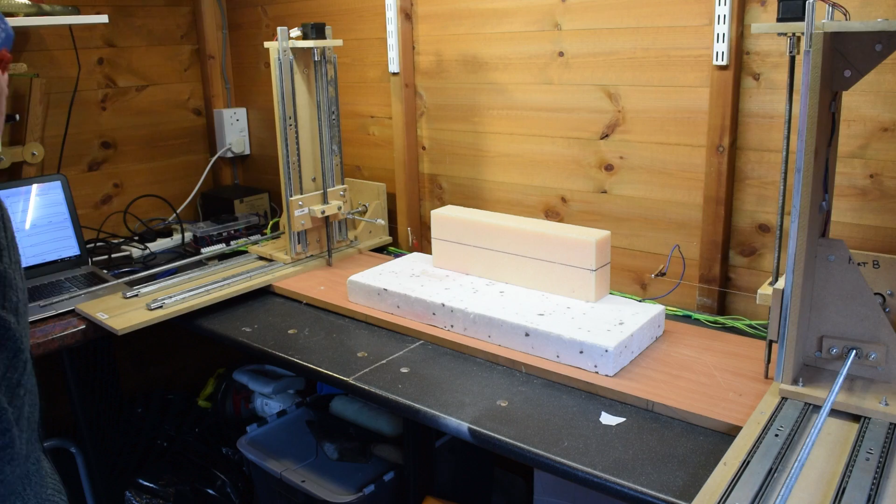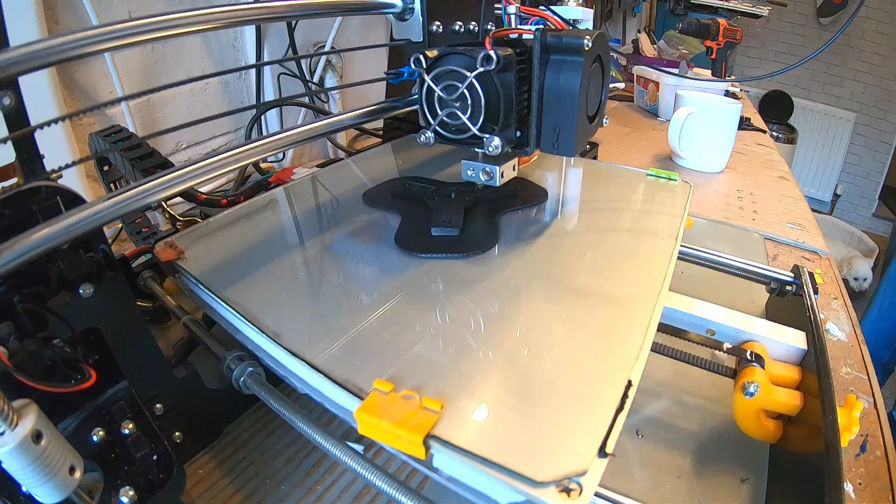This video I'm going to be using my new USB foam cutter to make some new blades for a gyrocopter, or AutoGyro as they're sometimes called. As well as making some new blades, I'm going to be making a new rotor head for it and some parts with the 3D printer in ABS. So it's going to be some foam cutting and some 3D printing. If that's interesting to you guys, then stick around and let's see how it goes.

You may ask why do you want to build some new blades? Several years ago, I bought a plan for an AutoGyro from a guy called Richard Harris. He's well known in the AutoGyro world, and he's had quite a few plans published, radio control plans. I bought one called the RPG. Sent off for the plan, it came and it was brilliant, but it looked a fair size model, and I'll put a picture up of it so you can have a look.

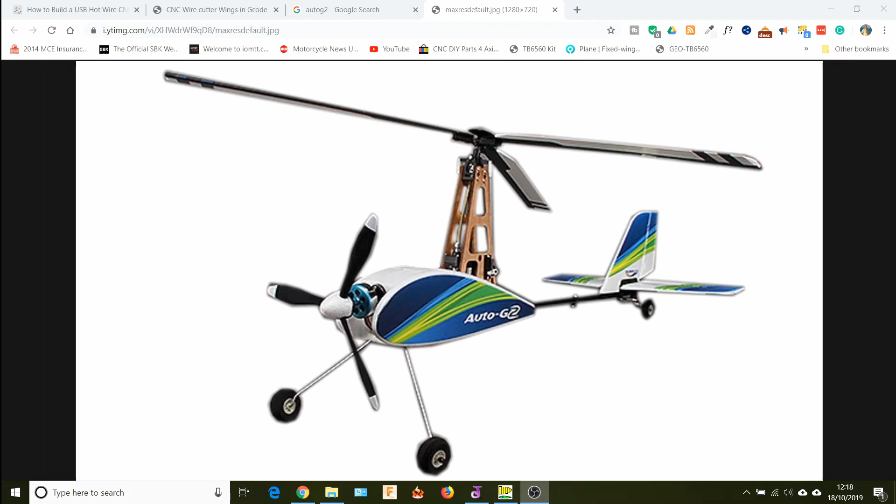When I got the plan, I thought, well, what's the chances of me building that and not crashing it first time out? So I thought I'd probably start a bit easier. At the time, Hobbyking had just brought out a new version of their AutoGyro, the G2, and that's got a pre-rotator on it.

See that little shaft going up there, that actually spins the rotor head, and it's got a separate little motor in there, and then it freewheels afterwards, and that spins it up and makes it easy to take off. I never had any problems taking it off.

It seemed to take off reasonably well, but once I got into there, I seemed to lose orientation with it, and I think basically I was trying to fly it like a fixed wing. Well, after 3 sets of blades, 2 props and various other parts for it, I gave up with it. I'd spent more on the spares than the actual model itself.

So I'd even decided to convert it to a fixed wing, and I made a foam wing for it, and I've still got the wing. I haven't progressed with it any further. This has been sat on the shelf for about a couple of years now.

So a little while ago I got the bug again for AutoGyros, and after watching some videos on YouTube, as you do, you watch something and think, well, I wonder if I can do that. Probably my failing, that is. See things that I think I can do. But I thought I'm not going to be spending out on all these blades again.

So I wondered if I could make one with the USB foam cutter that I've got on the website. This is the new USB foam cutter, and I've got a full video tutorial series, and there's a free ebook that goes along with it.

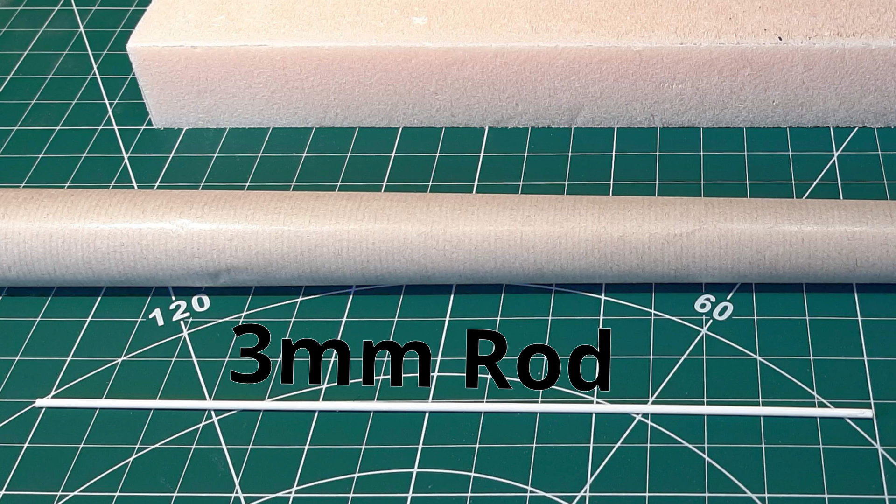We're going to be cutting a slot in here to put a strengthening spar in. And I've used some 3mm fiberglass rod that I've had kicking around, but 3mm carbon spar would be fine as well.

Then to give the wings some strength, what we're going to do afterwards is cover them in brown paper and PVA or white glue, sometimes called Elmer's in the US. I've covered lots of wings with this, and it makes an amazingly strong wing.

So from a sample blade I made, I put a carbon spar in there, then covered it in brown paper and PVA, and gave it a coat of sanding sealer. The blade's incredibly strong. I almost bent it double, and it hasn't broken.

So I think they're certainly going to be strong enough for this, and I think they're actually a little bit lighter than the Hobbyking blades as well.

So the other thing we're going to need is a way to cut the blade, and as I said earlier in the video, I'm going to be using my new USB foam cutter. So this is what I'm going to be using. That's my old design underneath, which is similar but uses older technology. I'm going to be using this here to cut the profiles in the foam.

But to do that, we need some software, and there's a few different pieces of software we can use. The one that I've used mostly in the past is one called Profili, but that's no longer available. It was paid software, but it's been superseded now by DevWing Foam, and I've upgraded that. But we have got some free options as well.

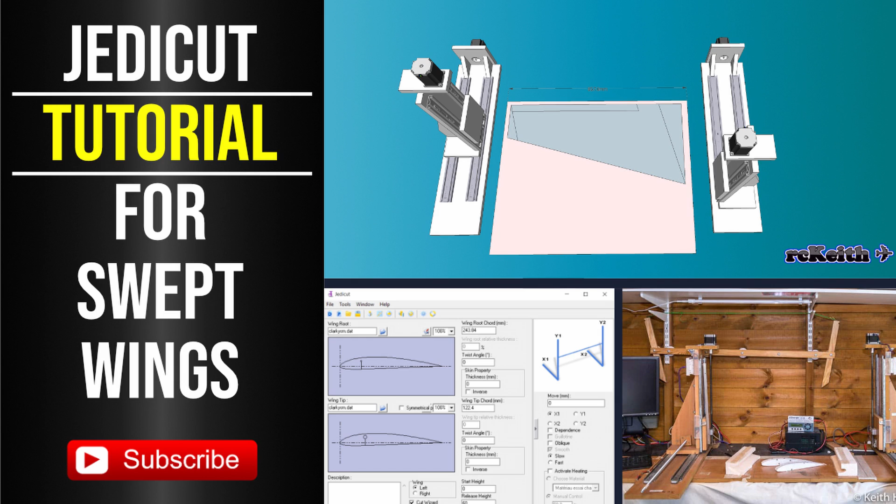Another option is one called Jedicut. It's another free version, and I've got videos on using both of these, so I'll link you to a video. The first half is about cutting a swept-back wing, and then the second half goes into Jedicut as well. So I'll put links up to them videos as well, if you want to use that instead.

But what I'm going to be using is DevWing Foam. So if we just bring DevWing Foam up.

This first little splash screen takes a little while because it's checking for a license. If you haven't got a license, you can do nearly everything apart from generate a G-code. So if you want to just try this program out before you commit to buying it, you can do that. As I said, it's not a free program, but personally I think it's well worth it, because you can make loads of wings, and I've made loads with Profili, and we'll be making a load more with this one as well.

So you can see I've already done one already, but we'll do a new one. So we'll create a new project, and on DevWing Foam, any window that's got a red line on it means that it's mandatory, so we have to put some details in there.

So we'll call this AutoGyro, call this demo, and we have to put some settings in here. So half wing length, this is going to be our blade length, so the blades are actually 370mm long. With DevWing Foam, there's lots of options on here that we're not going to need. We can even just take this expert mode off as well. For doing this blade, we only need a few of these options, so you'll see a lot of it we won't be doing, but I will be doing a full tutorial on DevWing Foam in a later video, so keep an eye out for that if this interests you.

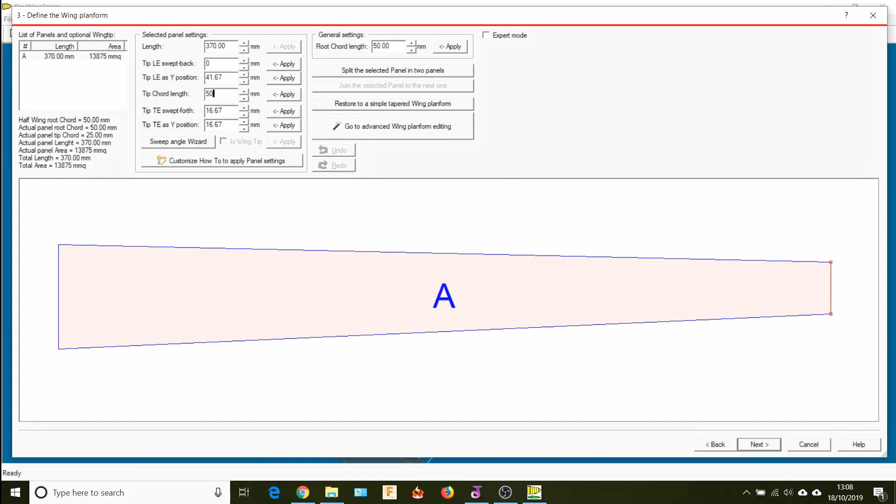So this again is a mandatory screen, and it's made a tapered wing for us, which we don't want. So we just put 0 in the sweep back, and then if we put 50 in the tip chord length, we apply that.

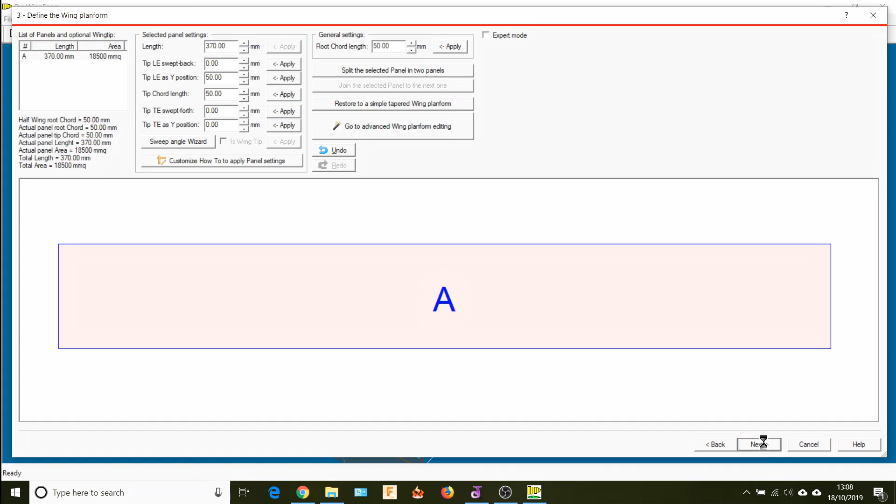Oh, it's gone back to 25 there, 50. Apply that. So now we've got our square wing, and you can see there's quite a few other options here designed for when we're using more panels, but that's all we need in this one. So it is 50, yeah. So we'll go on to next, and we can split the panels if we want, but we don't need that. You can see it's optional with it being yellow.

So this is a mandatory screen, and this is where we need to specify the airfoil we're going to use for this. Now, from my research I've been doing, it looks like a lot of gyrocopters use the Clark Y airfoil, and I found a video with a guy that actually built some blades for the AutoG2, and he used an airfoil called the Aquila, and he says it flew tons better. So I'm actually going to give that one a try.

So on DevWing Foam, what we do is we go into the root airfoil, select, and it's this one here called Aquila. I've got a filter on here, but I just take the filter off. In DevWing Foam, it's got hundreds of airfoils in here, and if it hasn't got one that you are after, you can import one, and there's quite a few places you can get airfoils from on the internet. I'll put some links in the description.

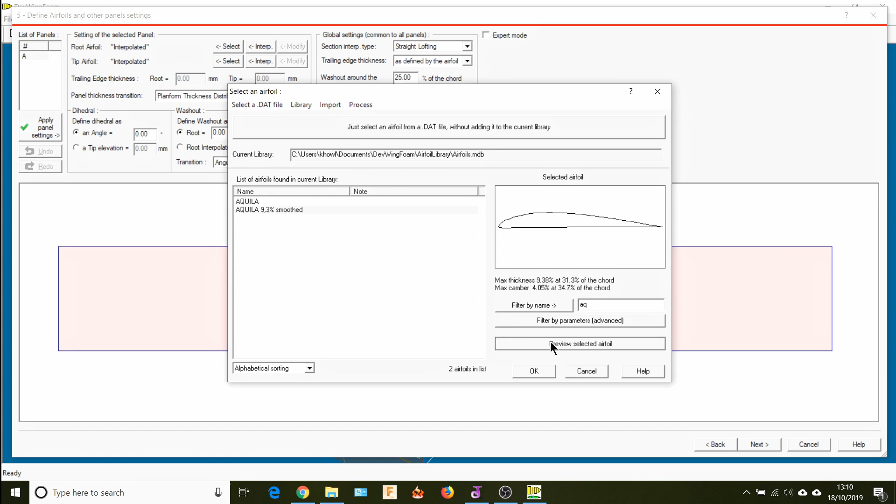So what we'll do is we'll just go for that Aquila again, and we can preview the airfoil as well. So you see it looks very much like a Clark Y, but I think it's a little bit flatter at the bottom. I think the Clark Y has got a slight camber on the bottom. So we select that one, and then we select the same for the tip.

This section here, interpolated, what that means is if we've got more than one panel in here, all we have to do is specify the root of the first panel and the tip of the last panel, and it will work out all the others. So we haven't got to go through and specify each one, but we'll cover that in a later video anyway.

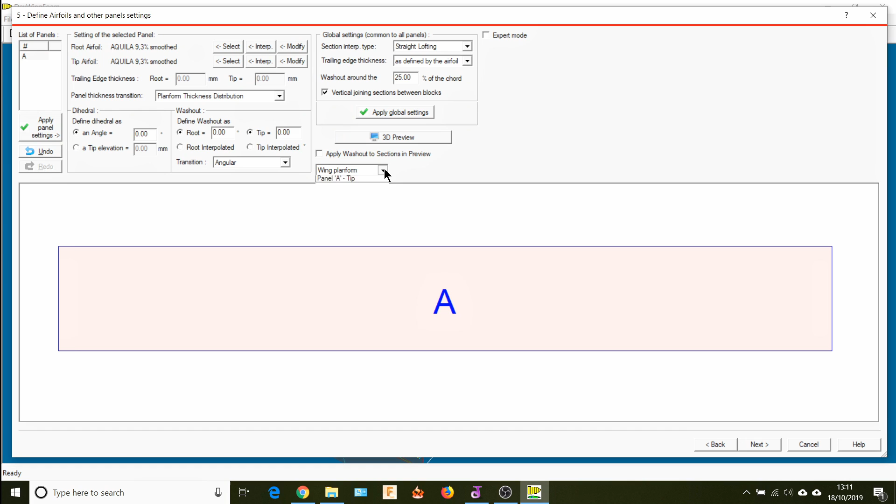So the other thing we do here, if I now apply that, and if we now look at panel A, which is the root and the tip exactly the same, there's no difference there. So what you'll notice down here is the airfoil comes to a point.

Now when we cut that in the foam cutter, what happens is this can get very thin, and it can burn away the actual foam itself. So there's a good option in DevWing Foam, and it's this one here, trailing edge thickness.

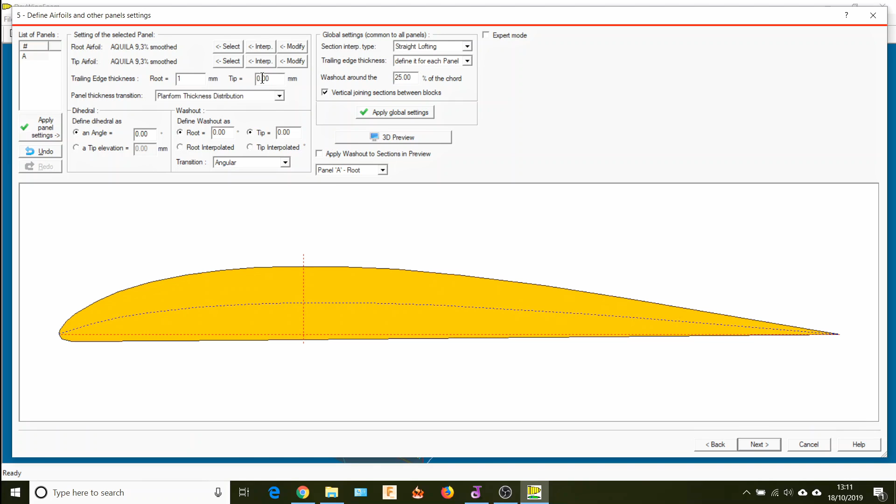So if we go into there, it says define it for each panel, but we've only got one panel. So what I found through testing is 1 millimeter there, and if I apply that, and if you watch at the tip now, you see that's expanded there. It looks a lot more than 1 millimeter because this is only a small blade, but that stops it from burning away to nothing. And through the testing I've done, that works out quite well.

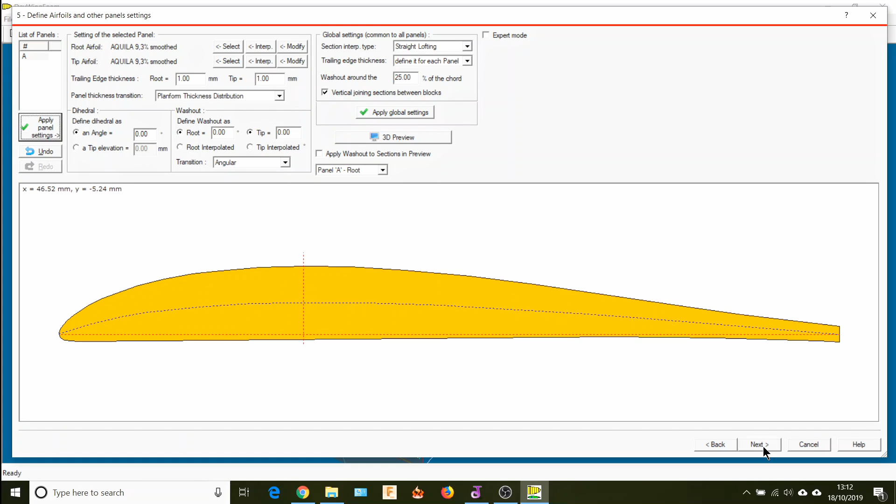Actually, we've got loads of other options in here, dihedral and washout, but we don't need them, and I'll cover them in the DevWing tutorial. So I'll go on to next. This is optional, and most of these other options we don't need now. We've done what we need, so we'll just carry on through them.

So that's saved that part of it.

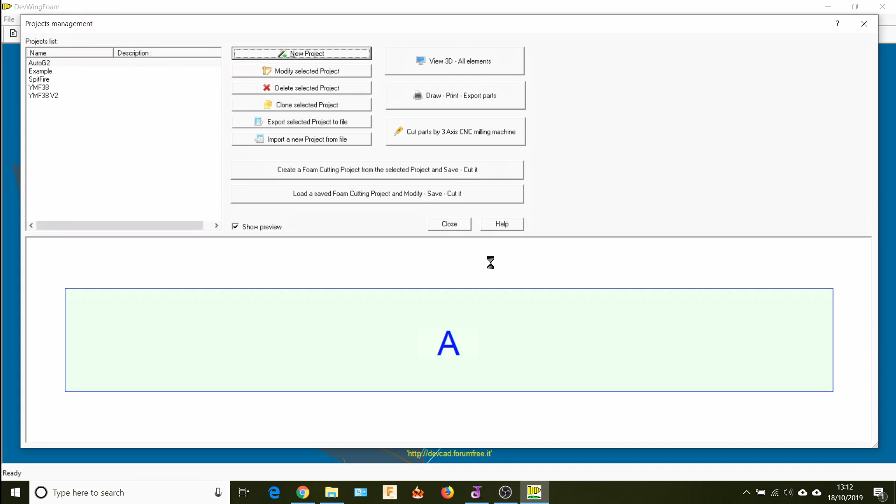So now we've done the design phase, what we need to do is actually create the cutting project. So we select our project there, and what we want is this option here, create a foam cutting project from the selected project and save it. This is what's going to actually generate the G-code, so we can cut our wing, cut our blade. Keep calling it wing. Right, so we select that.

And this is what we've done in the design part, so we've only got one panel in there. But what I like about this DevWing Foam, I can actually put 3 in there, so we can cut all 3 at the same time. Now, if you've got a swept back wing, you'll need to cut a left and a right, because if you cut 2 rights, you'll have a wing that won't look quite right.

So it doesn't matter which one of these we do, because this is just a straight wing. What I do is put it in 3 times, and that allows us to cut all the blades at the same time, rather than having to set each bit of foam up. Right, so we go on to the next.

This is where we set the speed, the kerf values, and the cutting strategy, which we don't need to mess with in this one. The speeds I found here are absolutely fine, but what I did find was the kerf value needed altering. The kerf value is the amount of foam that's going to be melted away by the cutting wire.

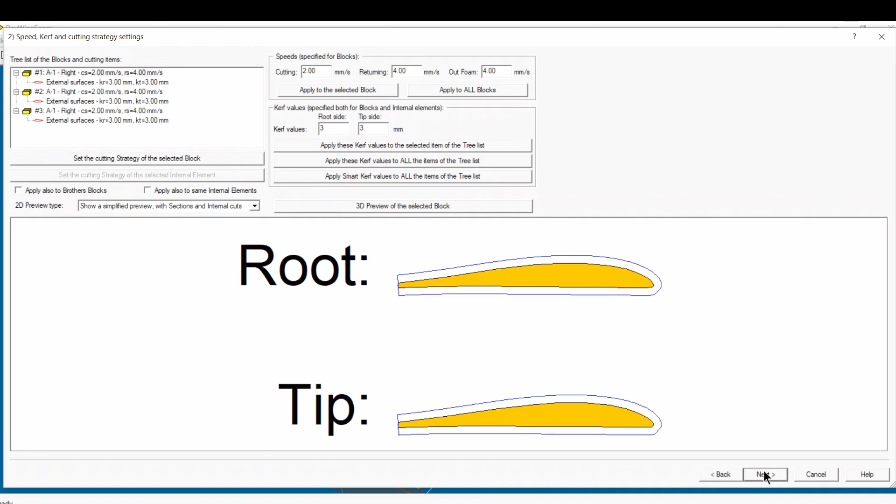Right, now this section here, setting the cutting order and foam block size, it goes in from the top anyway, so we don't need to change anything there. But what I have done is I have altered the values here to make these a bit closer, because I said earlier I'd only got 1 piece of foam left that was just big enough to do this.

So what we do is we select the bottom one and go into the top dialog there, and all we do is lower the space underneath to 5. That brings it down a bit, and we just do it for each one.

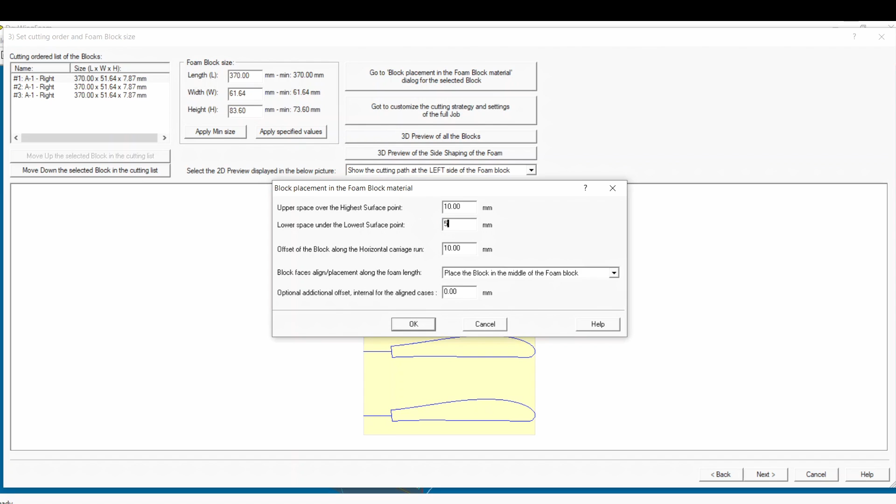You can alter the others as well if you want to get even closer, but you don't want to get too close, as they'll start running into one another. So if we apply minimum size there, that's telling us the minimum size of foam block we need. I think I used about 70 by 80 when I did the actual cutting of the foam.

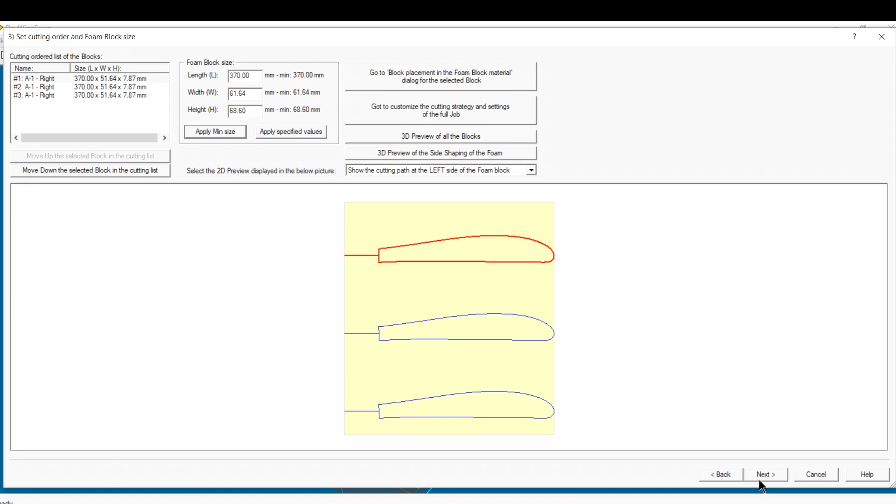Right, so that's all we need on that one. And this is the placement of the foam in the machine. Now, what you can do is you can set your machine up here.

So this gives the distances of the gantries from each other and the X and Y travel. My machine is set at 1000 millimeters or 1 meter, and then I've got 600 on the X and 400 on the Y. But if your machine is different, you can change those values there.

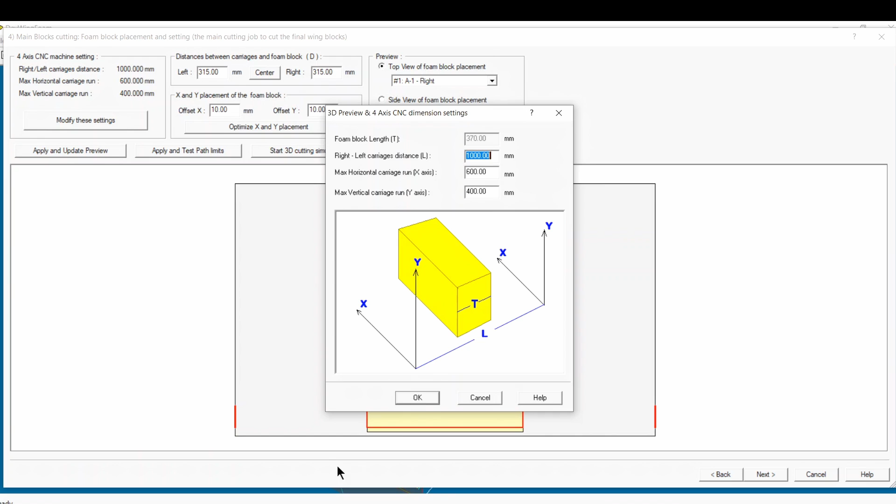So that's where it's going to place the foam block in the machine. But if you're doing a swept back wing, you need to make sure you get it in the right position. Otherwise, you can end up with a wing that's either smaller than you think or bigger than you think. But we'll cover that in a later video anyway.

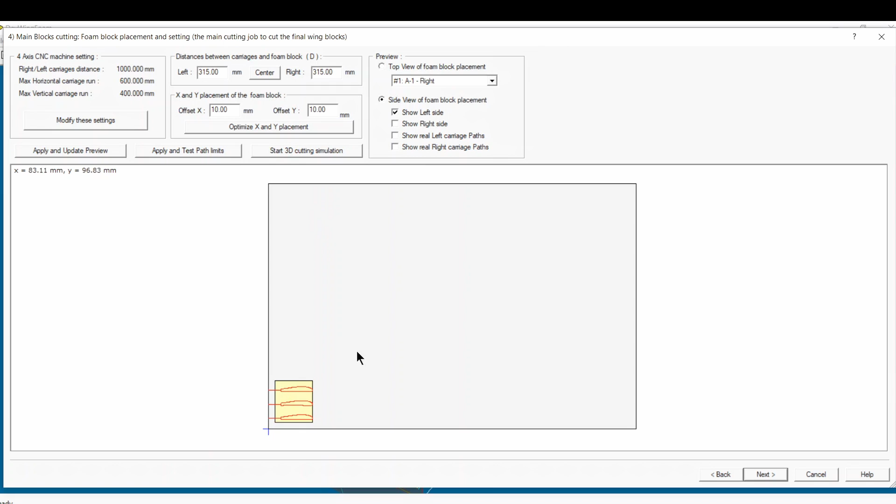So the other thing I do here as well, as you can see looking at the side view, it's actually got the foam block 10 millimeters up and 10 millimeters from. But I like to set this to 0. See, that comes down, and I get my wire as close to the block as possible. It's got a little bit of lead-in on there as well, so it'll be fine on that.

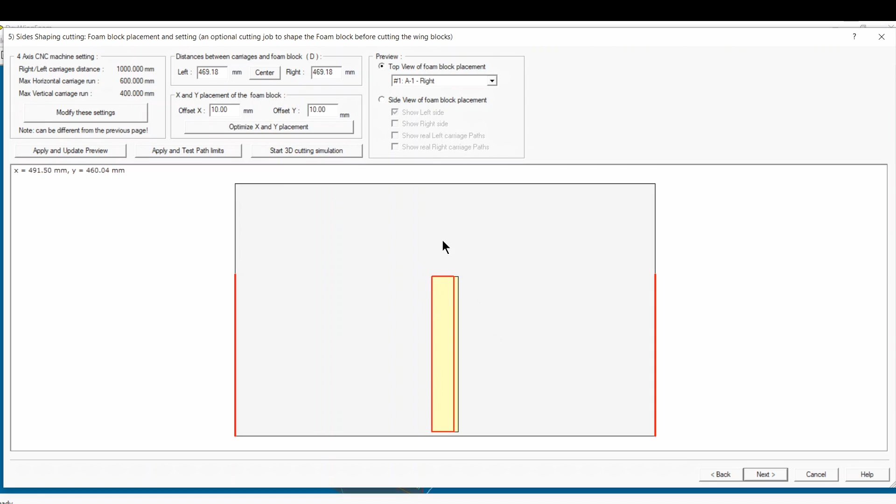So go on to the next screen. This screen here is actually pre-cutting the foam block for us to the right sizes. You can either do this manually or let the machine do it. So from the sizes that it's given us, we can cut the block to that size, or we can let the machine do it. But we don't need that in this case.

And the first thing I like to do when we get to the final page here, where we actually create the cutting file, I just like to save the cut project first. I've done this before, so I'm just going to replace that. And then what we can do is we can view them.

So that tells us the minimum size of foam that we would need for that.

If we go back, we can do a simulation. We've also got the option there, that second option at the top, where we could cut the foam block to the right size if we wanted to do that, and we would have two cut projects then.

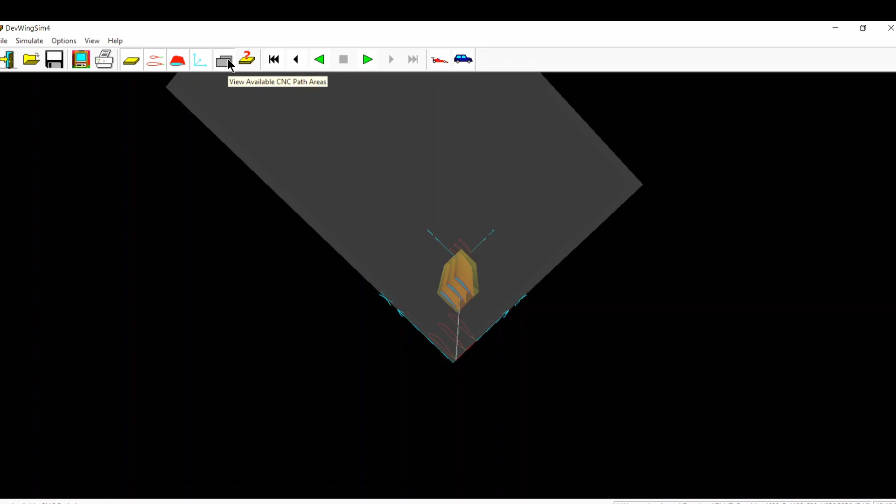So we just look at the simulation, spin it around a bit, and these grey ones here are the available paths for the axis. I'll just take them off, it's a little bit easier to see, and then we'll just zoom in a bit.

So this is the path the wire's going to take. For a straight wing, it's the same as the actual path of the aerofoil as well. But when you're doing tapered wings, this end will be bigger and that will be smaller, and vice versa when you do the other wing.

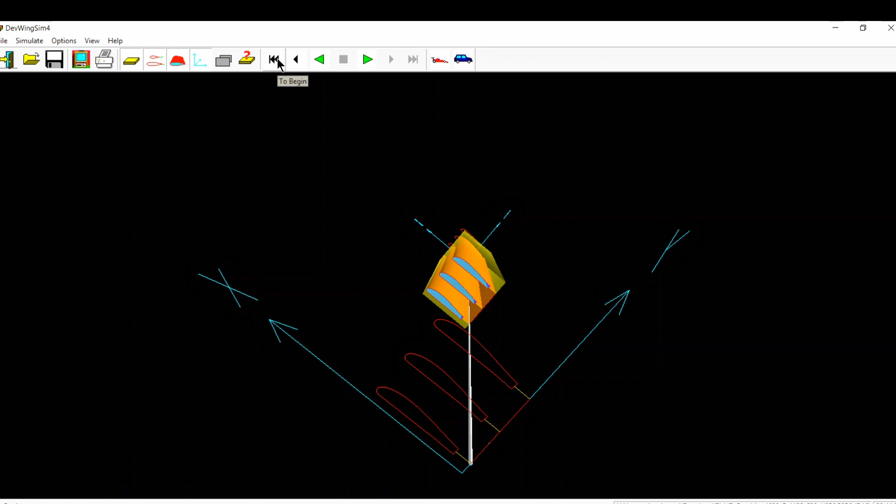So what we'll do, it always starts at the end, we'll just run it back to the beginning. It's quite good sometimes to do this simulation section so you can actually see what it's going to do, rather than get out to the machine and think, oh, I didn't expect it to do that. So we'll run the simulation and just see what it does.

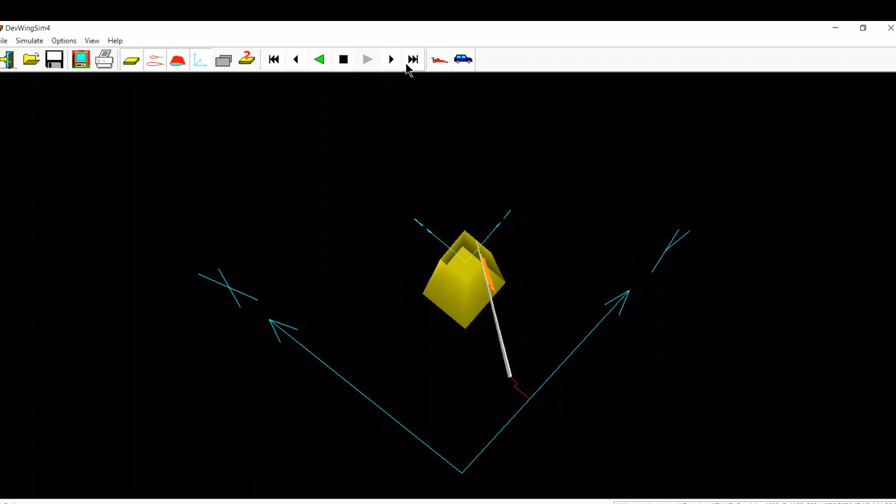To run the simulation, all we do is press start. There we go, hit the wrong button then. You see it's going quite slowly, but if we press this, we'll zoom in a bit as well. The more you press that, the quicker it goes.

So you can see it's starting the top one. Now what we don't want it to do is start the bottom, because what will happen is as it cuts the bottom one out, there won't be very much foam supporting the rest of it, so the whole foam thing will become a bit wobbly.

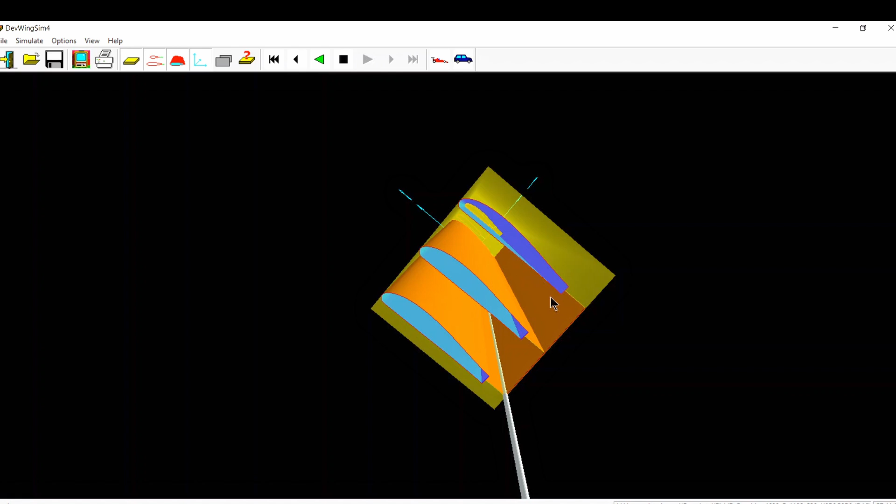So we do the top first. What I do is I stick the foam down with some double-sided tape on a support block. I've actually done this already, and it worked out really well.

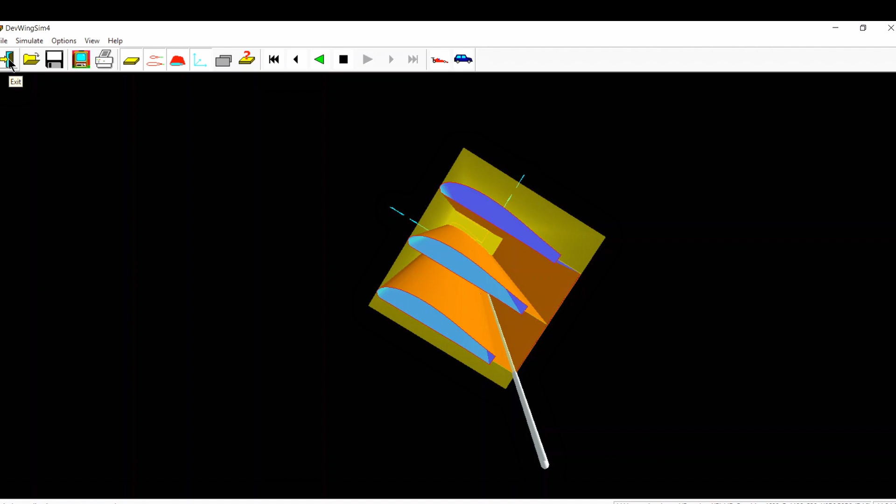So that's the simulation. What we want to do now is actually create the Gcode file. Now, if you've got the demo version and haven't bought a license yet, when you go to select this, you won't be able to go any further. You can run the simulations and everything okay, but this is where it will check that you've got a license.

And this is where we can change the axis letters if they're not right for our machine, but this is right for the machine we're using. And we can also switch the hot wire on and off.

It does work on the new machine with the Arduino and the ramps board. It works really well actually, but I just prefer to know the wire's hot enough myself before I set the machine off. Right, so all we need to do now is actually get it to generate the Gcode.

I just leave this as it is, I don't need any more options in here. So we just go OK, and then I've got it saved in a directory here. I'll just overwrite this one, 3 Blades Demo, and we'll save that.

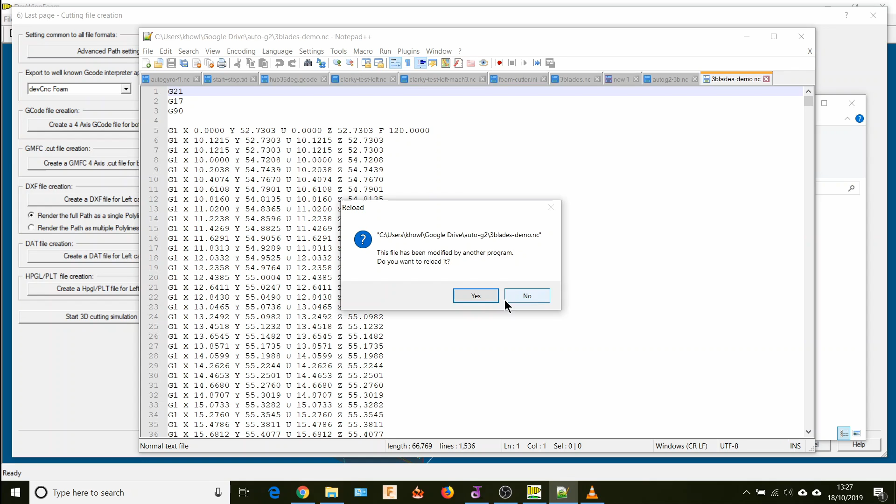And then if we go and have a look, I use Notepad++ to look at this, it's a real good text editor. So this is the actual Gcode. Not very exciting stuff, but without it wouldn't be possible, as they say. You can see there's loads of it in there, and it does work really well on the machine.

So that's the design phase done. What we need to do now is go out to the machine and actually set it up and get it to cut these blades and see how that goes. So we'll see you there, guys.

Right, so let's see if we can get these blades cut for the AutoGyro. I've been doing quite a lot of testing for the last hour and a half or so to get the temperatures right. Hopefully I've got it right. This is the only piece of foam I've got left that's going to be the right size, so hopefully it goes well. Let's see how we do.

So it's going to come up and do the top one first, cutting 3 blades out of this. It's slightly longer than it needs to be, about 380 at the moment, it needs to be 370. So I've just left a little bit on there to trim the ends off nice and square.

So here we go. You can hear it sizzling. I've had to alter the kerf value quite a bit.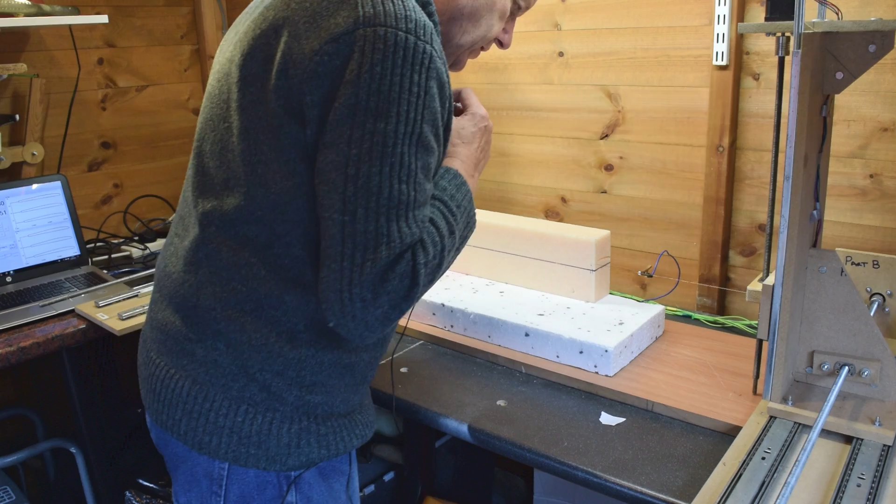I'm very close to just getting that blade out. It's come right to the edge of the foam.

Just zoom in and have a look. That's the first one done. It's now coming down to do the next one.

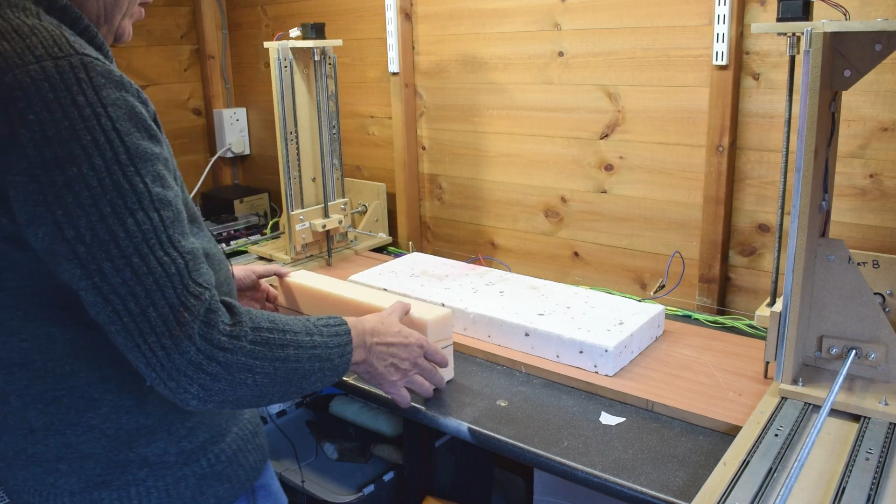Let's see what these look like. The foam's just been held down with double-sided tape. So let's have a look. Yeah, so that's not looking too bad. Once we get the spar in it, we'll just leave them in there for protection.

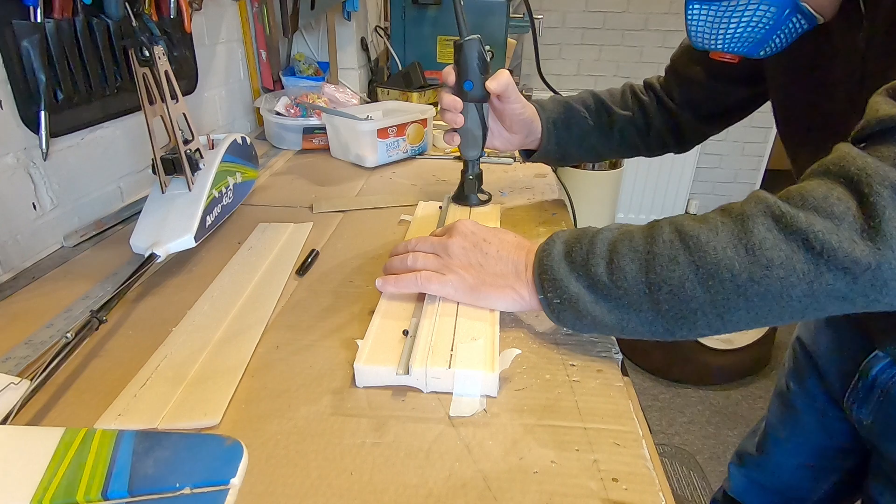Made that a bit wide there, just getting the camera in, but that'll be okay. So that should fit in there just right.

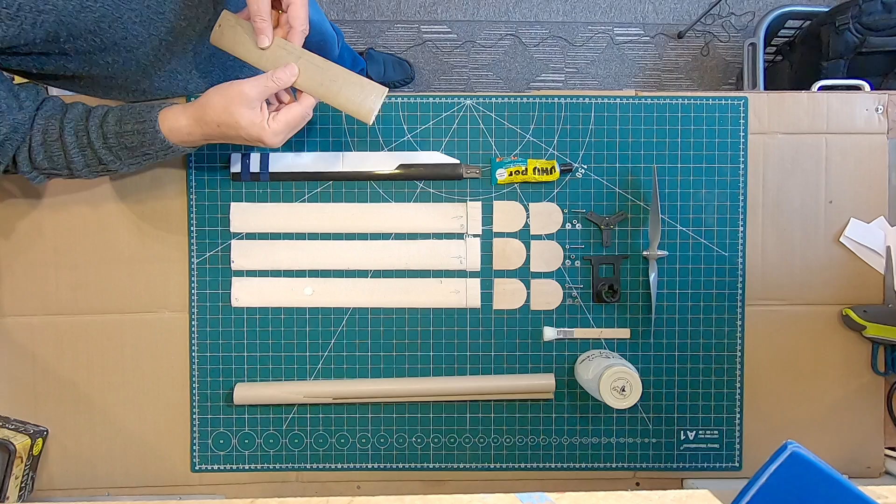So these are all the parts to repair the AutoG. I've put this, the sample blade I made, just as a quick test, which worked out quite well. And this is the original blade, so I've just put that in for comparison. That's the only one I've got left, and even that's a little bit damaged.

So these are the blades I've made, and you can see from the previous bit of clip, I've got the carbon rod in and then filled them underneath. And then what we're going to do, on this one I've already stuck a piece of balsa on there. The balsa is going to provide a little bit more strength, and it's been glued in with UHU por.

And so the intention is that piece will go on there, and this is just some light ply. I think it's about, let's just measure it. I think it's about 1.5 or about 1 millimetre. Yeah, it's just a 1 millimetre light ply.

And then that's going to go onto there. There'll be one underneath, like that. And then once I've got the blades balanced, so we need to balance these blades. Once I find the balance point, then we'll drill a hole 1mm back from where the blade balances on the chord.

And then what I'll do then is, these are some small bits of aluminium, and they'll go in, so I'll drill the hole for that to go in, and then the bolt and the washer will go in, and that'll hopefully, in the event of a crash, mean the blades will fold back, so I'll stand a bit more chance of learning to fly the damn thing.

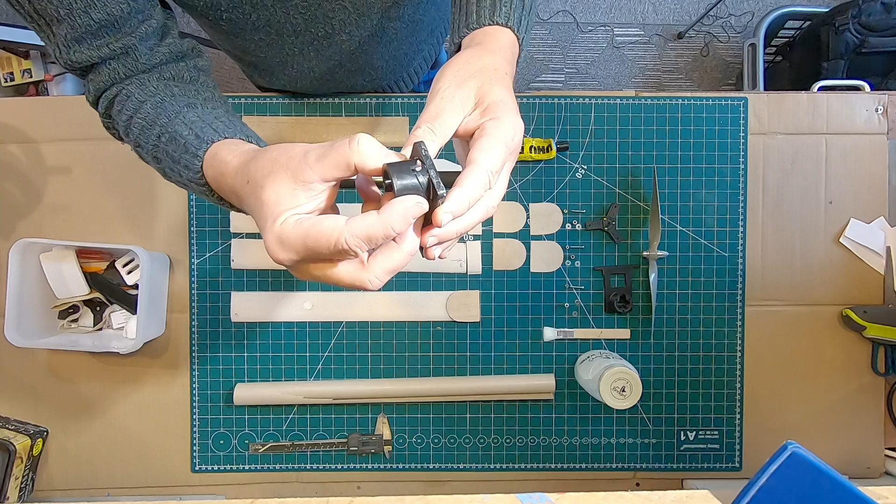And the other thing I've done as well is I've printed a new mount, because on the previous, let me get the parts. On the last crash, I think it was the second crash probably, you can see that's broken, and I've glued it a few times, and you know, it's never as good.

So looking on Thingiverse, a guy had actually loaded an STL file up for one of these. So I printed this one off, and I just did it in 20%, and it's pretty strong and it's okay. But the only thing is, where the holes go, there's no strength there. So I have printed another one.

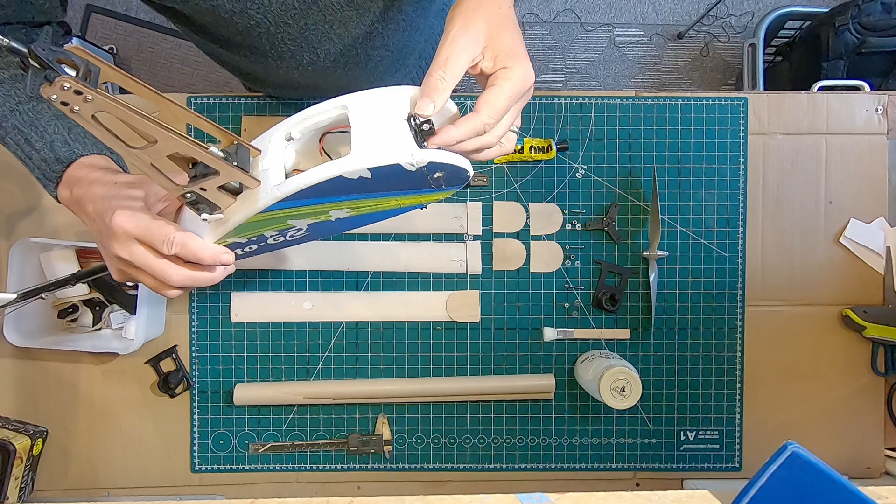I've actually got it mounted in now. So on the other one, that's actually mounted in. And what I've managed to do is, I found a good tutorial on Google by a guy called Chep, I think his site's Filament Friday. He's got some great videos on there as well. So what I've done is, on that part there, I've managed to print that 100% and leave the rest of it at 20%.

But the only difference between this one and the one from Hobbyking, let's get this up and see if we can see it. The Hobbyking one has got a bit of down thrust in it. So try and hold them side by side.

And this one is dead straight. I did try modifying the design, but it started getting a bit too much. So all I've done is attached a couple of washers to the top to give it more or less the same angle, so that should give us the same amount of down thrust.

And the other thing, because I've broken the 3-bladed prop, I'll be using this 2-bladed one. Now the original prop is a 10x8. So usually what you do, and there are formulas to work it out more accurately, but what you tend to do is if you're going from a 3 to a 2, you go up on diameter and down on pitch. So it was a 10x8, this is an 11 diameter and 7 pitch.

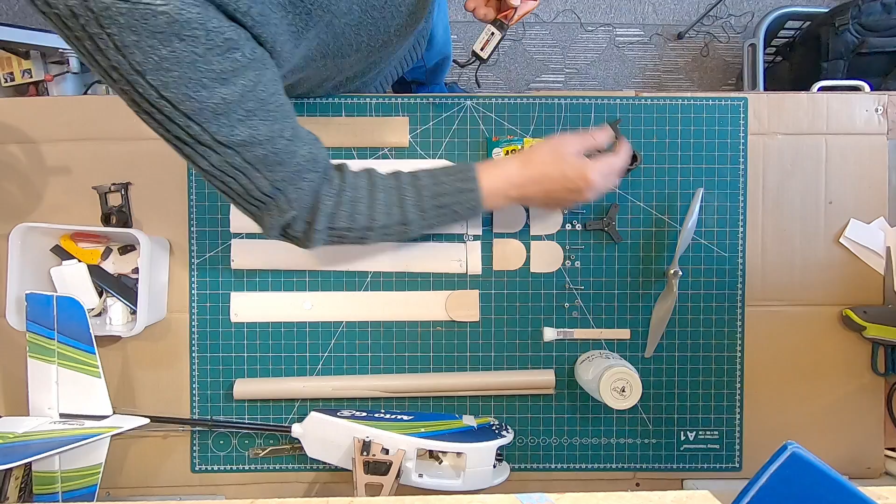I haven't actually tried that, so what I'm going to do is put the watt meter on and check the current draw on the speed controller, because the speed controller is just a 20 amp speed controller, and I think it might draw a bit too much current, so we'll have to check that. If it does, I'll probably go down to a 10x7. I don't want to buy another 3-bladed prop from Hobbyking, I think I bought 2 of them already.

So what I'll do now is a time lapse of covering the wings with brown paper, and after that's on I'll put a coat of sanding sealer or non-shrinking dope, I think I've got both, and that gives a smoother finish. The only problem with this test one is I didn't do any filling on the foam, and you can see it's a little bit ripply. On these I've given them a very light skim of lightweight filler, and once the brown paper's on that should be smoother. Then I'll give it a light rub down, then the sanding sealer, and hopefully this will work. There's only one way to find out, I suppose.

So what we'll do is get on and do a time lapse on covering the blades. I've got a longer video on covering wings with brown paper and PVA, and it seems to be one of the most popular videos I have on YouTube. It's a good method of covering, best of all it's cheap, and it's amazingly strong. Once you get a bit of carbon rod in there and let it dry off, it's incredibly strong. Of all the wings I've made and flown, when I've had a crash it's never been the wing that breaks, it's always somewhere else. The wings survive really well.

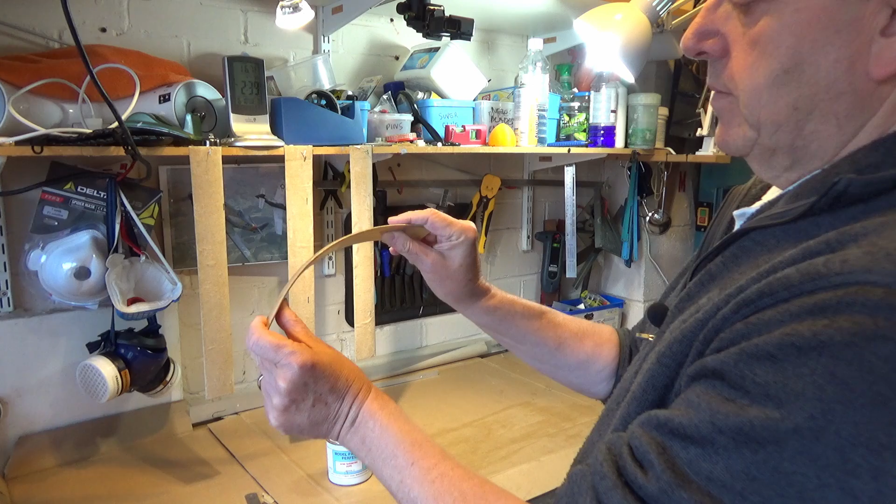So you can see that one there, that's got a bit of a shine on it - let's actually try it. See, that's got the bar in it now, and you can see how far I'm bending it. I don't think the Hobbyking ones would do that. We'll see how that goes. I've damaged it a bit there as well - you can see I dropped something on it - but we'll come back in the morning, have a look at them, and hopefully they'll be good blades.

So here's the blades all dry now, and they've come out really well - I'm quite pleased with them. There's a slight little lip there, I can barely feel it with my finger where the paper's been overlapped, and they feel quite strong now.

So all we've got to do now is get the strengthening pieces on, top and bottom, and then we'll give it a coat of this sealer, this non-shrinking dope, so that'll give it a nice shiny finish. And then what we've got to do is balance the blades, and once they're balanced I can drill the holes and we can start to get mounted up.

Not sure how I'm going to finish them yet, whether I'm just going to paint them or I could even cover them in film as well, but they're looking pretty good. So on to the next bit.

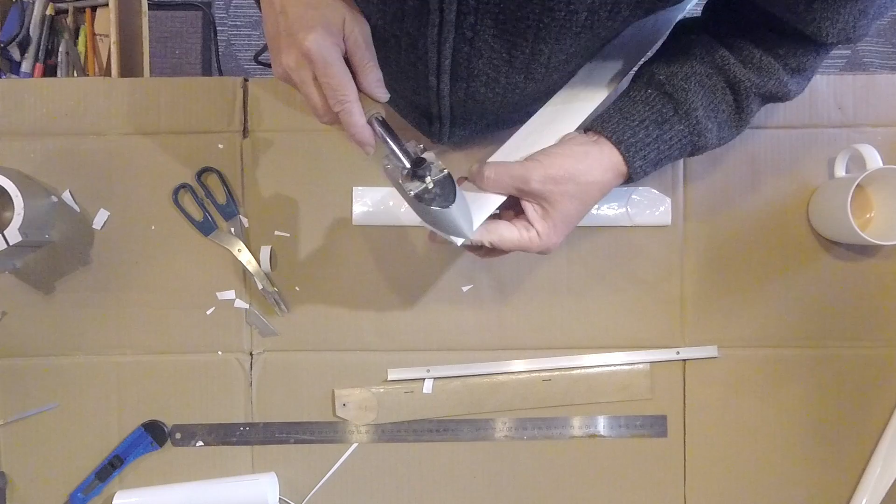Well, here it is, all finished. As you can see, I've got the blades on, and in the end I decided to cover them with white solar film. They haven't come out as good as I'd hoped.

I think the problem was I had the iron too hot. I forgot to check the settings on it. I realised by the time I got to the third blade, which I think was probably this one, and it came out a little better.

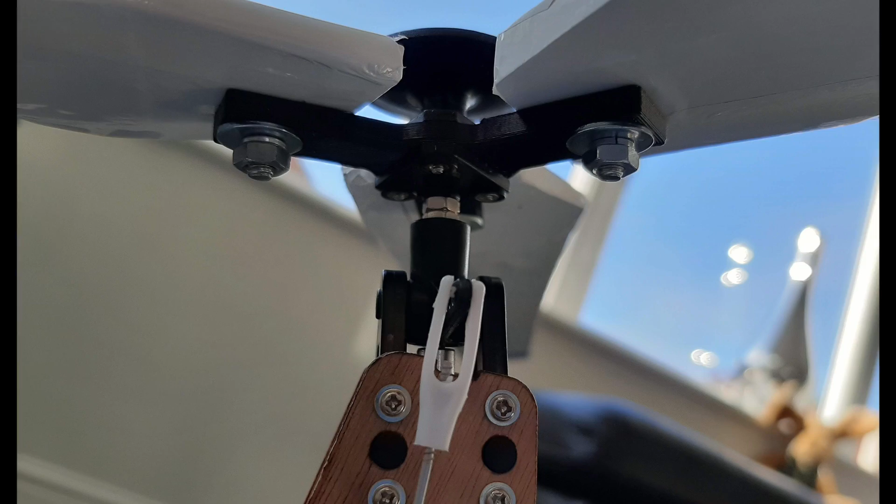But it's now on with the ABS 3D printed rotor head, and it's been mounted on with some screws. I'll just get a bit closer so you can see.

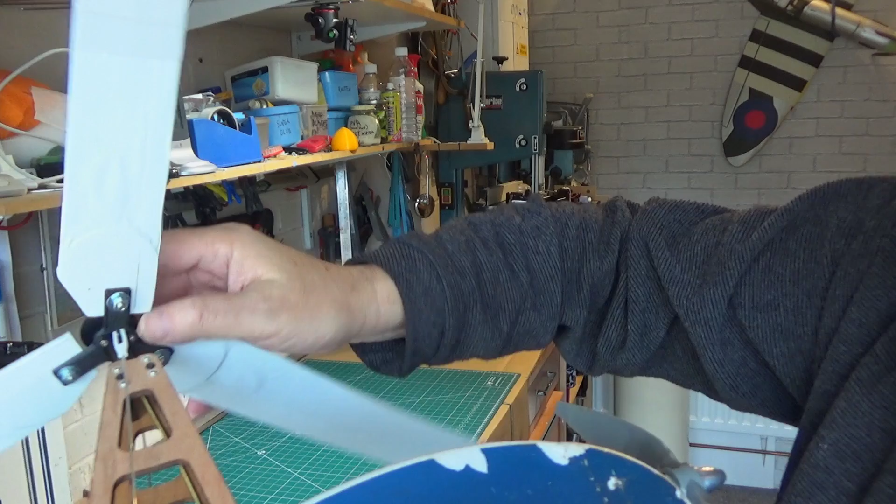So if you can see under there, it's on a single pivot now, and then it's got washers either side, and the blades will actually move. So I'll put it down and show you.

So the blades, they're reasonably tight, but in the event of a crash, hopefully they should fold back and I stand a bit more of a chance of learning how to fly it.

And what I've done as well is I've tested the prop with the watt meter, and what I found, it was pulling about 18 amps, and it was a 20 amp speed controller, because the original prop, if you remember, was a 3-bladed prop, 10x8, and this is 11x7.

So what I've actually done is I've put a slightly bigger speed controller in. I've got one of the Hobbywing speed controllers in there, a 25 amp speed controller.

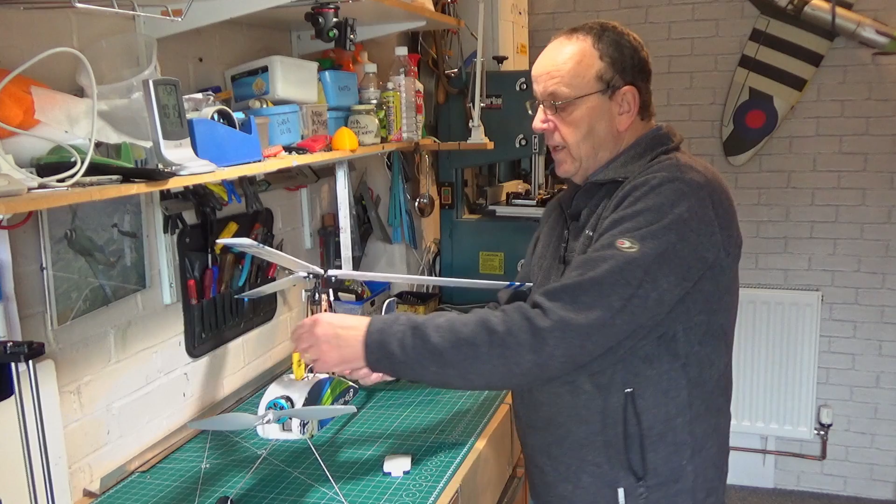And there's actually 2 speed controllers in here. Yeah, that one there, you can't quite see it too, but that's a speed controller that controls the motor in there. I have actually got a spare one of these because I managed to break one of them with my first.

So I bought a spare one of these. I can't remember why I bought it now, but you can see that's actually got the speed controller on it there as well.

And that's the flexible shaft, and you can see it allow you to turn it one way, but if you try and turn it back the other way, it won't go. Well, it will, but it turns the motor. So I've got a spare one of them in case we need it.

And it just runs off a little 1300 3S battery. I've used these on quite a few things. I use it on my MiG-29, which you've probably seen on one of my videos. Pre-rotator plugs into the balance lead. So when we get down to the flying field, I'll show you that working.

The weather's changing a bit in the UK now. It's starting to get quite cold and windy, so I'm ideally looking for a reasonably calm day, probably about 5 or 6 mile an hour winds. There's a possibility, so this is Saturday, so there's a possibility on Wednesday I might be able to get it to fly. So we'll see how that goes.